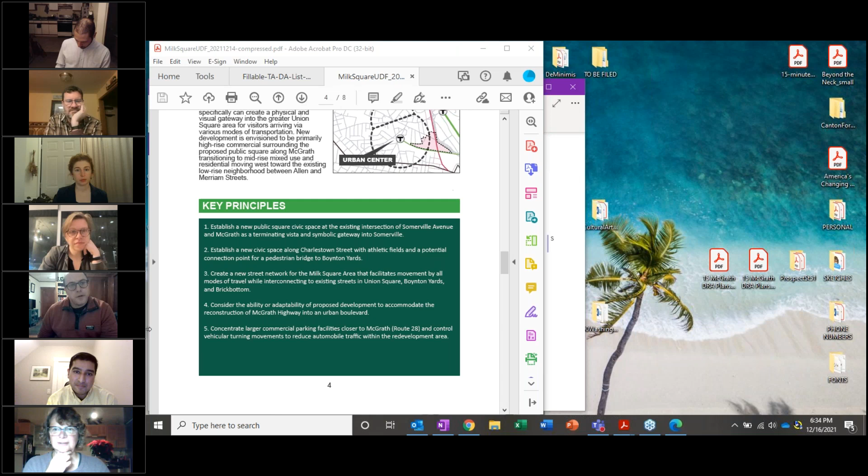So, thanks Jahan. Sarah, if we could ask for your presentation on Milk Square. Yes, I will keep this brief, and hopefully I can share my screen and you're getting the right view of things. Do you see the PDF?

Okay, thank you. The Milk Square area is a combination of two areas within, between Brickbottom and Union Square proper. It was part of the plan, let me scroll down, it's in the ordinance as Union Square East. That is generally the site you see here in a darker pink, also known by the address 200 McGrath Highway. The other area is actually part of the Union Square neighborhood plan that was sometimes referred to as Union East in that plan, sometimes referred to as Milk Square.

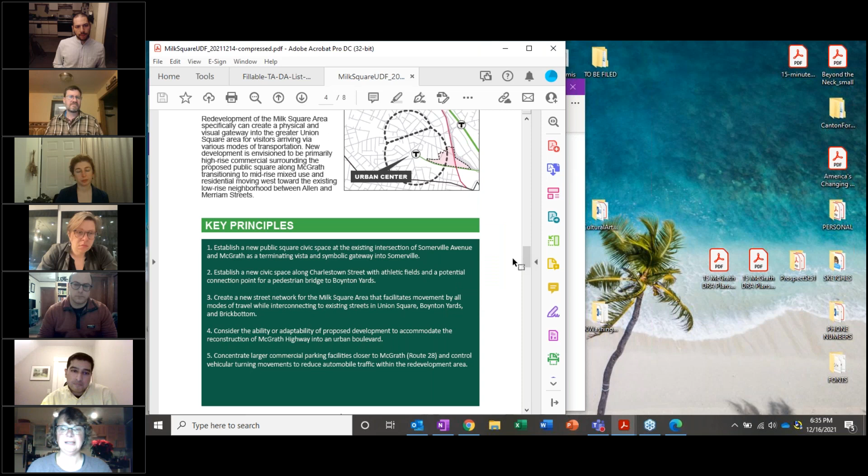Milk Street was the former name of Somerville Avenue, and the Union Square neighborhood plan identified a street network that brought into effect the idea of a new open space. Sorry if I'm making you seasick. Once McGrath is grounded, it will be the edge of the urban boulevard and is basically across from the art farm site. So this is what we're calling the Milk Square area at the moment.

It does take into effect what the Union Square neighborhood plan outlined as the Grayfield development sites. For those more familiar with what's on the ground, that would be the area where the Burger King is on Somerville Avenue, where the Target site is, and further down Charlestown Street. We've also included in this area what was proposed in the neighborhood plan as the Charlestown Street athletic fields.

So these were areas that were treated loosely in the neighborhood plan. They will need more study as we move forward, and so there will be another planning exercise that looks at these areas in detail. That includes the areas closer to Union Square as well, sort of between Merriam and Allen Streets. That will be a future neighborhood plan, but this urban design framework sets up the need for that.

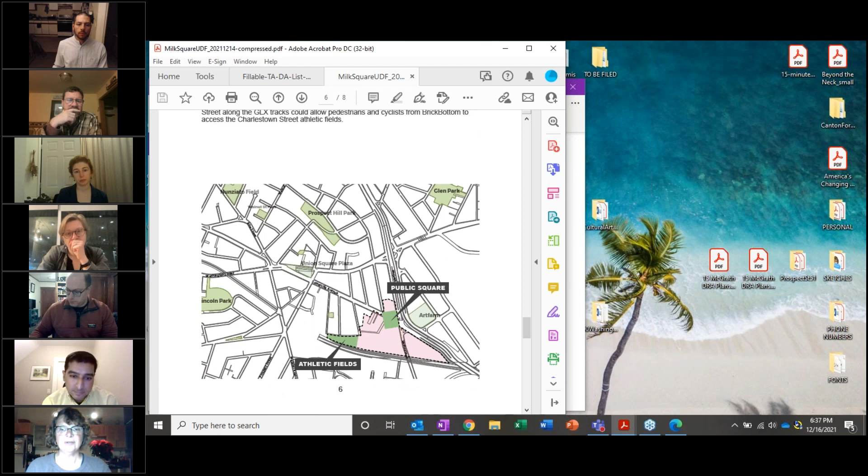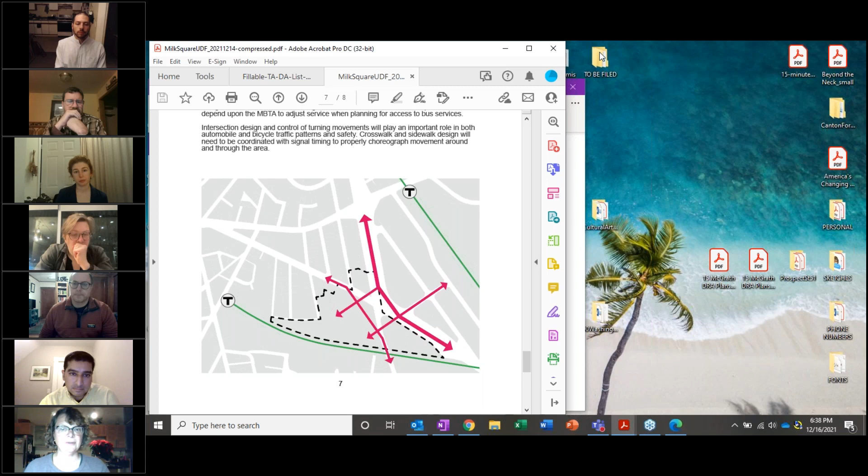Coming back to the Union Square neighborhood plan, there was a network proposed to link the Brickbottom neighborhood across McGrath Highway with the grounding of McGrath to the open space I mentioned, and also a potential realignment of Medford Street into Somerville Avenue to clarify the area that is currently the pinch point where Somerville Avenue comes into McGrath Highway.

The big information I do want to impart is, as I said, a lot of this will be refined further with a neighborhood planning exercise, but we did want to bring it to the attention of the planning board and get this process started. It can be refined as we go along, but know that this is an area that is going to be moving forward.

We expect it's similar to the Boynton Yards area to have a 0.6 per 1,000 square foot parking ratio on the entire district, which means on the 200 McGrath site, that would be about 700 permanent spaces. We can dig into that once we have a more detailed neighborhood plan for this area.

The intent is that it will transition from the higher traffic McGrath Highway, where there might be taller buildings, to being sensitive to the residential area between Union Square and Brickbottom.

All right, looks like we got the presentation, so I'll start with an introduction here. Once again, my name is Ryan Souls, the development director on this project, working with Greystar, the developer and owner of the site. We're excited to be back in front of the planning board this evening to continue our discussions on our proposed development project at 74 Middlesex.

Just as a quick refresher, the project is a 16-story, 494,000 square foot purpose-built lab office building in the Assembly Square neighborhood. The project plan also includes a neighborhood park civic space located at 0 Kensington Avenue that I think will be discussed, similar to last meeting, subsequent to the 74 Middlesex building.

John, you can go to the next slide if you want. I think we heard a lot of good feedback during our hearing last month, and there were a handful of items that the planning board asked for additional detail on and had questions about. So we have a very short presentation hitting on some of those materials, and then I think we can open it up to more general questions and comments. You can see here an outline: the facade materiality, ground floor and 16th floor program, the parking program, the canopy and building base, the utility plan, and then, similar to before, we'll pause and start the 0 Kensington civic space separately. Next slide, please, John.

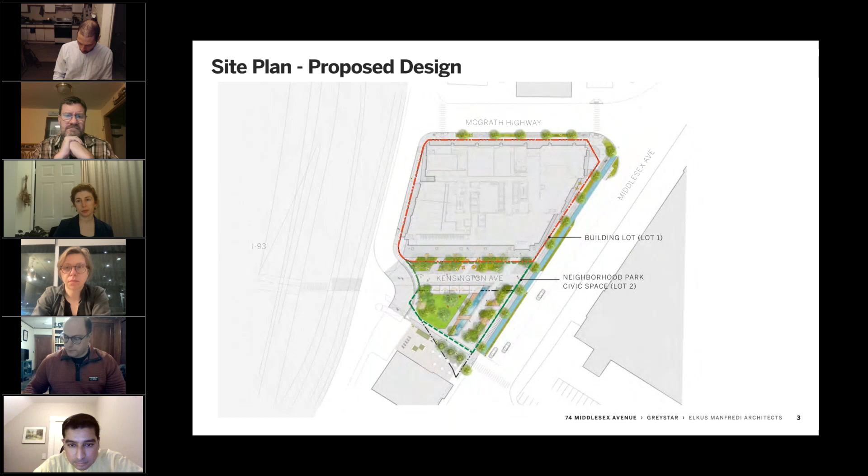I think we might handle some of them together, but just outlining the building lots: building lot 1 shown on this plan is the 74 Middlesex building, and lot 2, the neighborhood park civic space, is the second part of the application, just to orient everybody. Next slide, please, and I'll pass it over to David.

It is made up, and most of you will remember from our last presentation, of these 3 parts that kind of slip past each other, giving the building its shape and quite different articulation on all 4 sides of the building, which I think gives it great interest. Next, please.

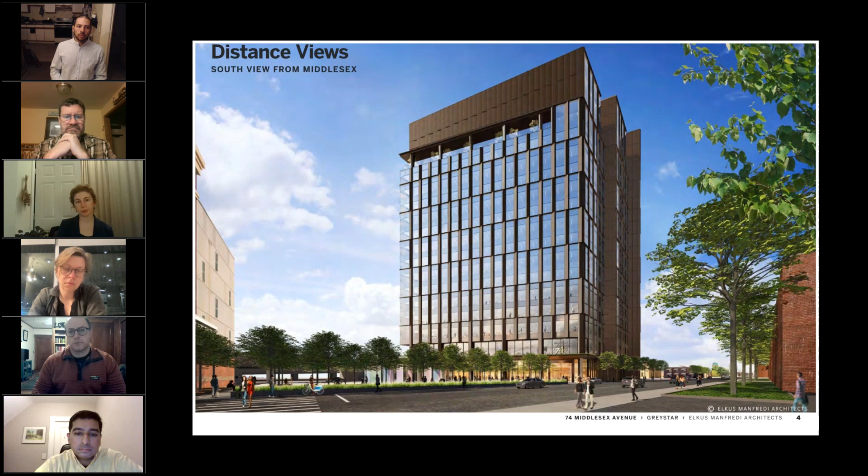So coming up Middlesex from the south, again, you can see the self-storage building, the neighborhood park, and then the proposed building with a very simple but highly articulated frame. Those are metal panels. The floors are ganged together 2 at a time. There's open space up at the top of the building for the tenants of the building. You can see how the building on the west side, on the highway side, actually is shaped to that site, and as you'll see in a moment, gives the building its real character. You can also see that the top of the building, the mechanical spaces are kind of pivoted in order to provide full expression of those areas as well, and not as an afterthought. Next, please.

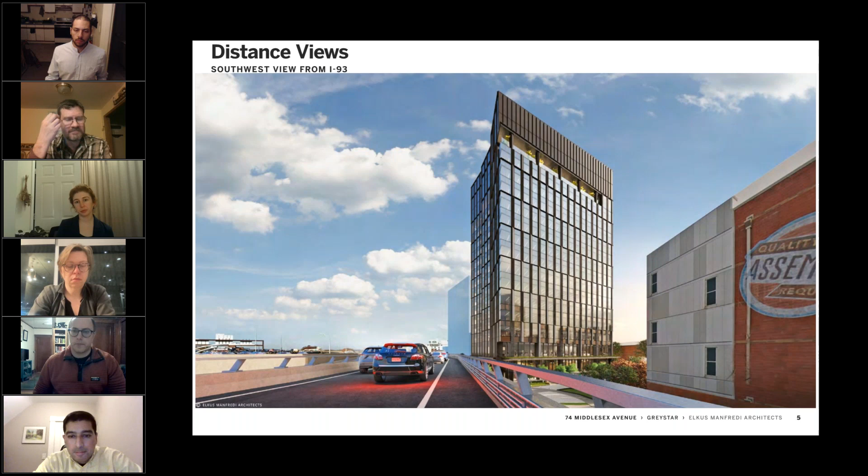And so on the west side of the building, that's 93 in the foreground, and now you can really see what I'm alluding to in terms of this kind of 3-part composition, this notion of these very slender forms and how the cladding of the mechanical at the top of the building is made fully part of the architecture of the building and not an additional piece of massing that's kind of plopped down on the top of the building.

Next, please. And so we spent a lot of time with Chapter 5, the high-rise district design criteria, and I think we are completely consistent with regard to this very strong idea of a unified whole rather than a collection of unrelated parts. And so we have kept the material palette to a minimum, really three materials plus the glazing. Your standards, which require this kind of horizontal stacking and not an ungoverned mix of materials in order to really highlight the big idea of a base to the building, a middle, and a top, all of which we think is well-reasoned and good urban design.

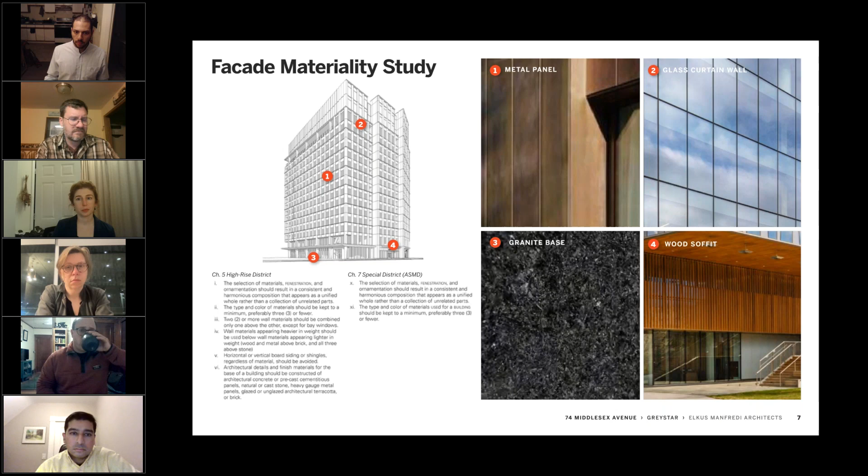Next, please. You can see my colleague, John McDonald, on site. We wanted to see our metal samples on site. You can see the glass he's holding in his right hand, very transparent, the metal panels. This isn't absolutely final, but we've gone through a whole series of tests looking at that metal panel, and you can also see the wood. That's the underside of the canopy.

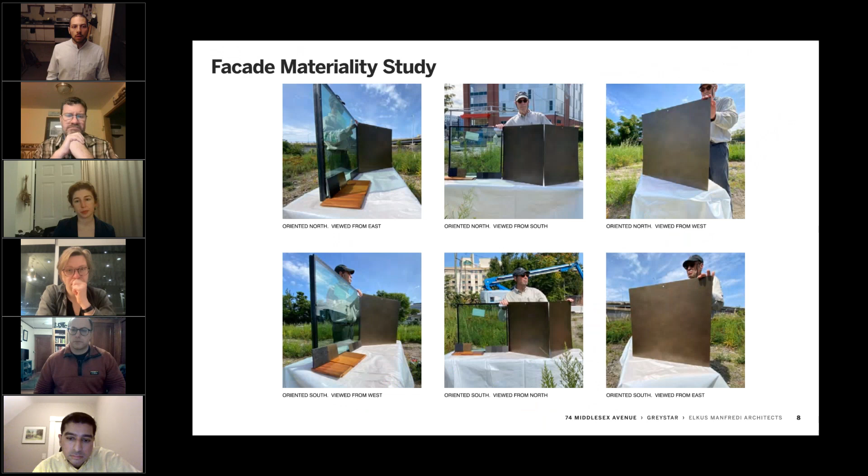Next, there are simply some additional photographs, combined into one. That's okay, that's fine. I want to go to the ground floor. There was a specific question.

You can go to the next, John, which had to do with how the ground floor works. You'll remember I mentioned we have this through lobby. What you see in the lavender color is the through lobby, anticipating future development north of McGrath. Active edges on the neighborhood park side, on Middlesex, and wrapping the corner onto McGrath. All of our building utilities, loading docks, and access to parking are on marginal, up against 93, and pretty much invisible to pedestrians.

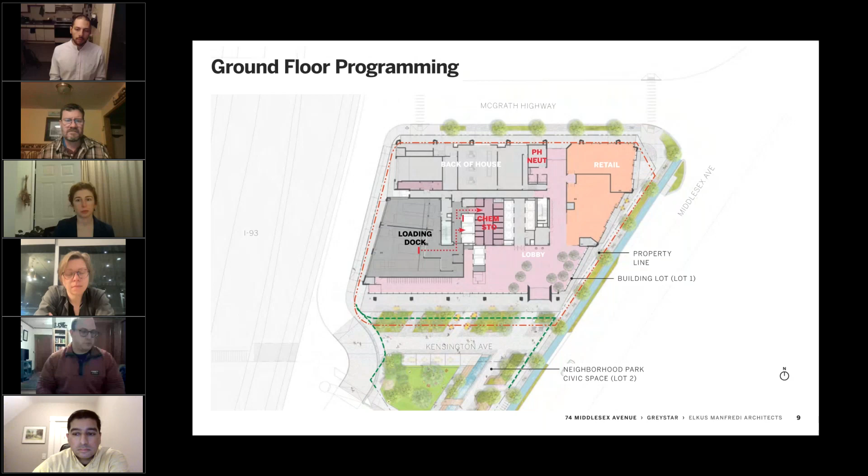There was a question about chemical storage. This is a lab office building, so all of our loading docks are completely internal. All offloading happens on the dock. If you follow the red dashed line, you can see sometimes material goes directly into the service elevators and up the building. Sometimes it goes into chemical storage, awaiting retrieval and transport up the building. The reverse flow happens for used chemicals, with pH neutralization treating the used chemicals. Next, please.

There was a question—I should have mentioned, we won't go back, but our bicycle storage is much more than bicycle storage. It is a celebration of bikes. It's on the ground floor, facing out onto the neighborhood park. It's basically a two-story space, and the intent is to make this a real hub for bicycling in Somerville. We've located our lockers and showers up on the top floor of the building, which is our rooftop amenity.

And there's a question, why'd you do that? We did that for two reasons, really. If you look closely, this is our amenity space. There's a Pilates/yoga kind of room where you see the 12 or 13 rectangles off to the left, and a golf simulator space. The intent is that there's an exercise room on top of the building. There's a lot of competition for space on the ground floor, especially given the dedication of space to bicycles, so the lockers are here on the top floor. We'd expect individual tenants will provide those kinds of accommodations as well—we see that in most of our buildings.

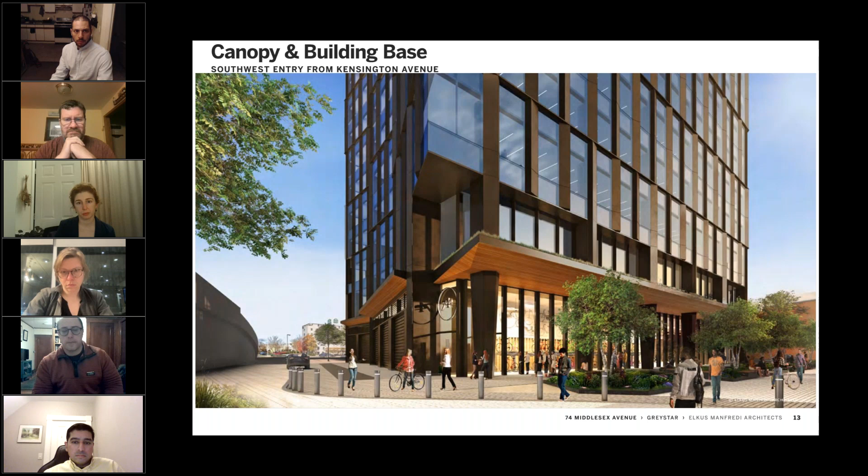Next, please. This is my last slide, and the last of this part, lot one of the presentation. There was a question about overhead power lines, which exist today. The existing overhead lines are the red dashed line, and the power lines will be buried for the length of the solid red line. They will be brought down underground and then brought back up again beyond the site. You can also see new underground tel data lines that will be located adjacent to the power lines.

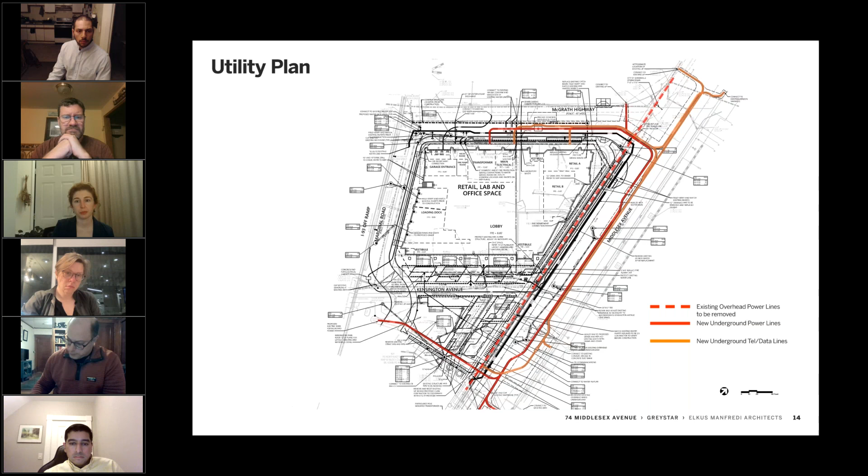And with that, that concludes our presentation, first part on lot one on the building, and happy to entertain any questions. Great, thanks very much.

This is an application that was previously opened, previously presented, previously taken testimony on, and previously had discussions and questions by members of the board. The questions and concerns of board members are why we have the application before us again. It is not new information; it is responses to comments and questions that members of the planning board had at the last meeting.

Oral testimony closed at the end of the meeting on the 18th, and written testimony closed on Friday the 10th. So because no new information has been presented, it was just in response to questions by members of this board, testimony will not be reopened this evening. For anyone in the attendee list looking to speak tonight, testimony has closed, closed on the 10th.

So what I'd like to do is open it up to members of the board to ask any further questions of the applicant or of staff, or make any comments. Obviously there was quite a bit of discussion at the last meeting on this, so I don't know if what the applicant has presented has answered some of the questions.

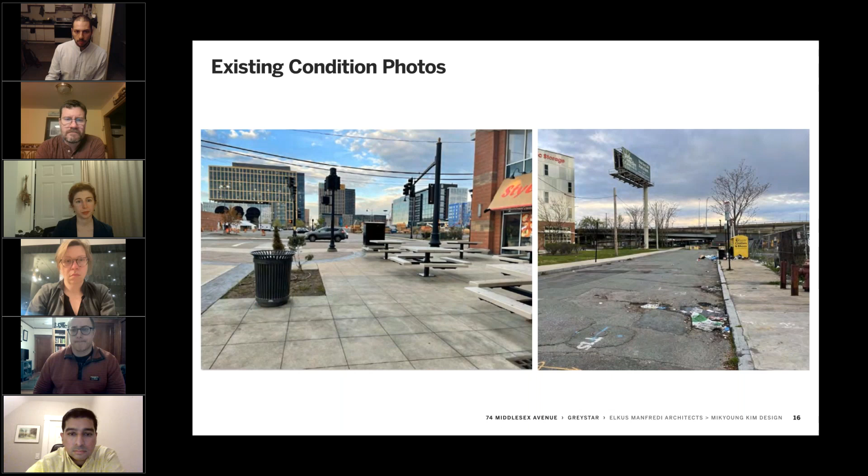We've been working closely over the past almost year now with the UDC and PSUF. Working with them, it became clear that the programming was really important, and ultimately our goal in this pocket park or neighborhood park was to create a diversity of experiences, bringing passive and active recreation within this community park. So we have fountains, shade trees, a central lawn and garden seating, and a trellis with flexible seating underneath it. Together all of these different elements are focused on creating a welcoming environment for the neighborhood.

There were some questions about connectivity, and I think through our discussion we wanted to share the diagram of both pedestrian circulation and bike circulation. Connectivity was a really important driver for the overall design. You can see there are two main access ways through the park that connect you back to the city of Somerville, but also we've been working very closely to make sure that the connection to the Kensington Underpass, or Kensington Connector, is coordinated really well with this park.

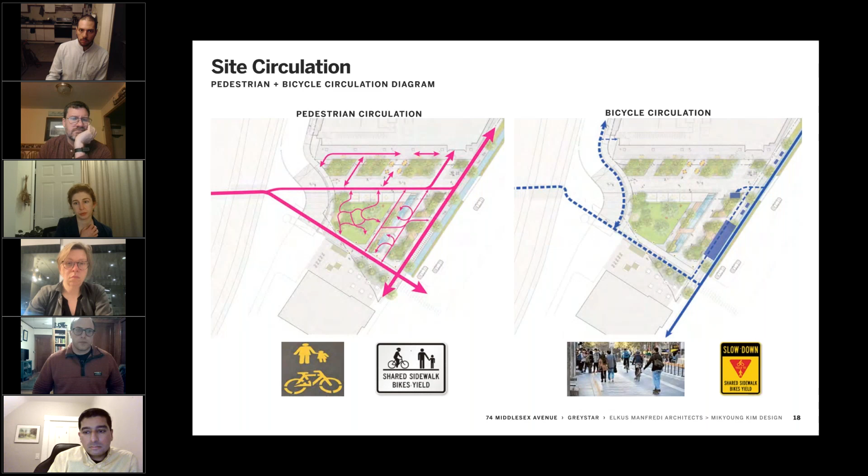We've kept it really short. We felt like the park itself will provide not only a lot of great programming for this neighborhood, but also an asset of native, high-value plants and diverse habitats, so that all season the neighborhood has a place to go to. So we're very excited to hear your comments about this.

Thank you very much. Similar to the other aspect of this site, where it had previously been open, testimony had been taken orally and had also been left open for written comment through the 10th. Testimony has closed. This was a response to comments and questions from members of the planning board. No new information has been presented, so testimony will not reopen on this application. We are here simply for a discussion from members of the planning board with the applicant and with staff as needed, so that we can move forward with this application.

So does anybody have any comments or questions right now on what was presented just now?

Yeah, Rob. Yeah, I have just one question. To what extent have or will the applicant be coordinating with the city and MassDOT's plans for their renovation of the Kensington connector? Part of the reason why I'm asking is I think everybody recognizes the importance of that linkage, and I'm trying to understand, will it feel like a continuous, seamless pedestrian and bike experience?

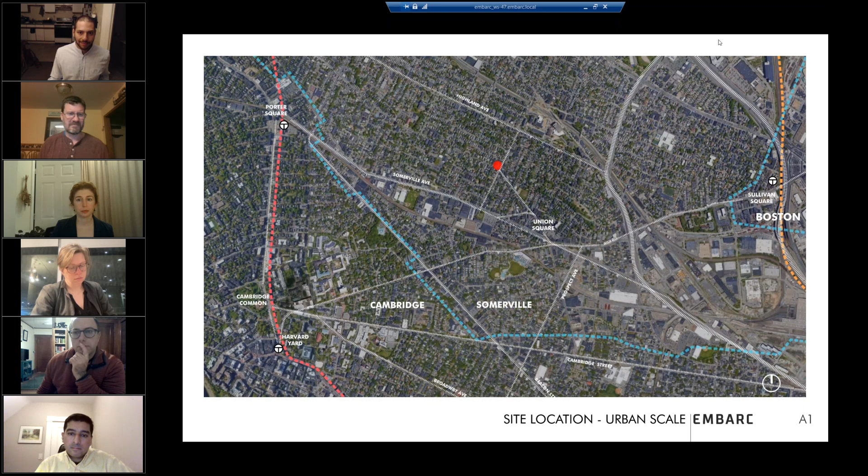You have been unmuted, I'll get started. As Nick mentioned, part of what we wanted to present today was a quick step back to show how we got to where we are today, and where we were initially. Some of our previous analyses were not included in our previous presentations, so we wanted to quickly go through some of that. Just by way of orientation, quickly refreshing on the location of the site here at the corner of Summer and School Street, just to the northwest of Union Square.

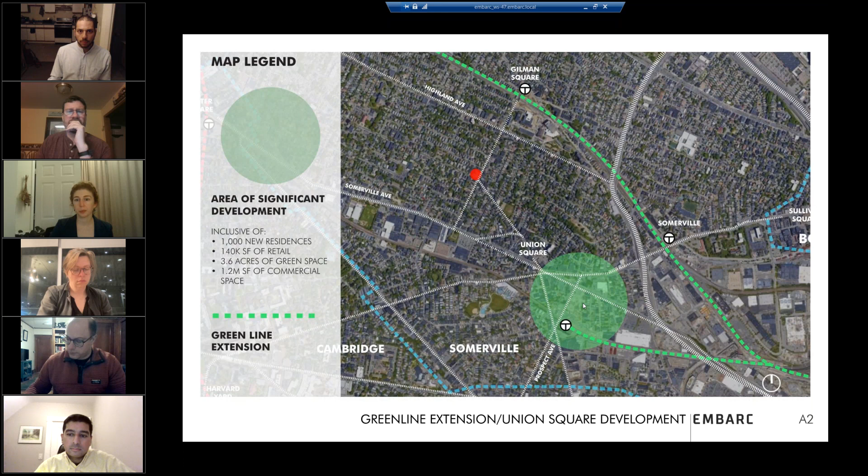Early on, we were cognizant of the future and ongoing development happening in the immediate vicinity, the extension of the Green Line, the addition of several stations both north and south of our site, as well as all the associated development in the area, which honestly extends far beyond what's shown by this green dot. The ongoing development adds to this feeling that we're a link between these hubs of activity that are already there and being increased as the future unfolds.

We're located along this direct link between Union Square and Gilman Square, where you've got Town Hall, the Somerville High School, and various restaurants.

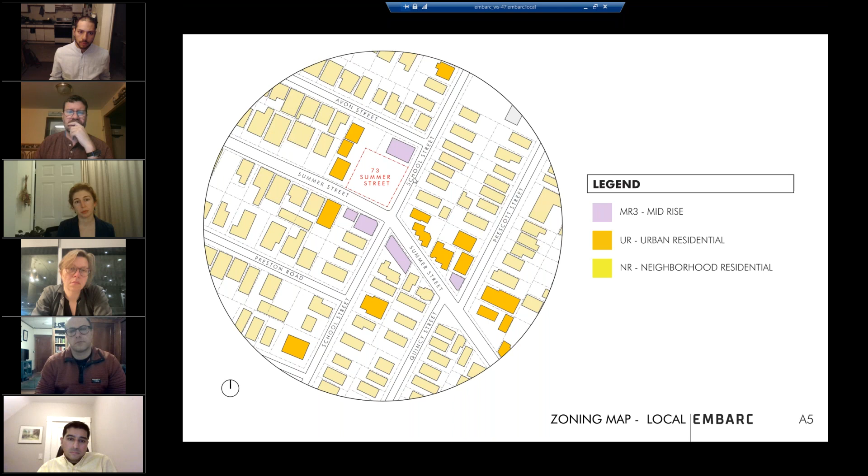Going through our zoning again, we're an MR3 mid-rise, proposing an apartment building, 3 stories with 27 dwelling units on a roughly 14,600 square foot site. We do have 2 front yards.

I'll show you that in a diagram here in a second. 2,500 square feet of open space yields a 0.27 green score, which Ryan Noon will briefly talk about. And then our parking, by virtue of the fact that we're in a transit overlay district where we have a parking max, we have 18 spaces relative to a 27 space parking maximum.

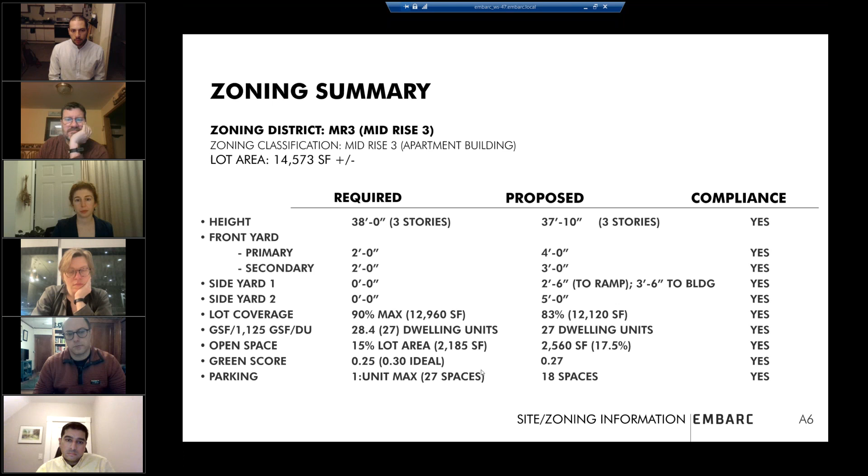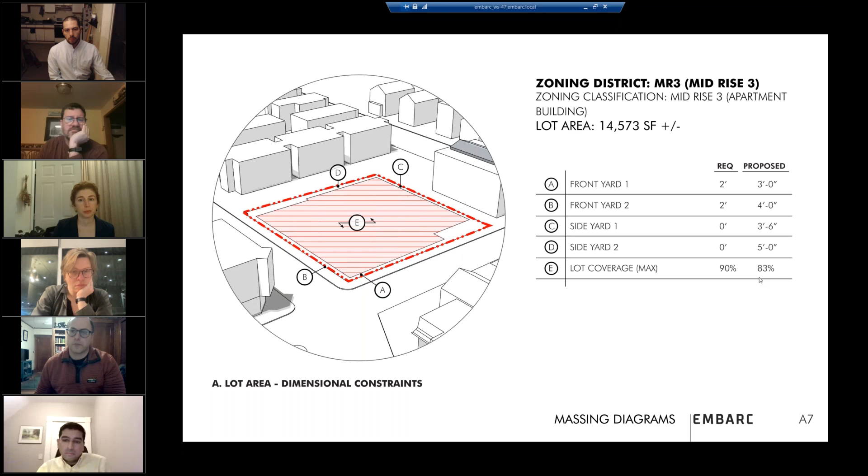A series of zoning diagrams showing how our massing is respondent to the zoning. We have 2 front yards, required 2 feet along both front yard property line setbacks. We're at 3 and 4 feet respectively there to create roughly a 12-foot wide sidewalk along both streets. We have 2 side yards that require 0-foot setback; we're at 3.5 and 5 feet respectively. That yields an 83% lot coverage relative to a 90% requirement.

We extruded that footprint up 5 feet 10 inches to get to our first residential level. That comes straight from the zoning, creating a base that allows our windowsills to be at an elevation that creates privacy for the inhabitants and hopefully encourages them to use those windows for things like ventilation and natural daylighting. Then we extruded that footprint up to the allowable, or just under 38 feet.

At the pedestrian level, we wanted to create entry to the building removed from the intersection. So our pedestrian entry along Summer Street is kind of halfway along the facade, and we pushed our vehicular entry as far away from the intersection as we could. Then at the street corner, we took this notch out at the base to try to create better visibility around the corner for traffic purposes.

And then to the north, finally, we pushed back the massing there to create this public parklet along School Street. Then the rest of our open space, shifting over to this right diagram, we consolidated with that public component to create this amenity courtyard for the inhabitants of the building.

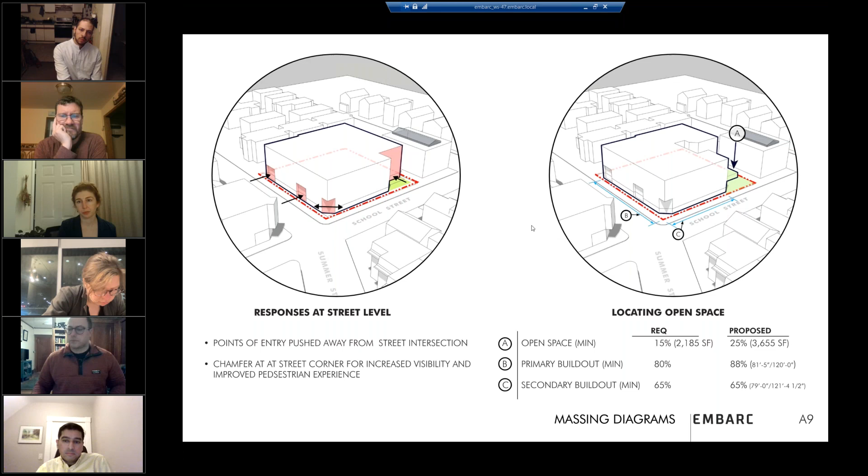I'll take you through the next handful of slides, which are the floor plans of the building. I know we presented these last time, so I'll do a fairly cursory review and just highlight the changes we've brought for this presentation.

By way of orientation, Summer Street is on the bottom of the page, and School Street runs vertically on the right-hand side. As previously spoken about, on the left-hand side of Summer Street, as far from the intersection as possible, that's where the vehicular entry is. We have an update later in the slideshow where we also locate our loading zone for the building, which was a comment from our last hearing.

About halfway down the building on Summer Street is our pedestrian lobby. Moving around the top of the page, the building steps back and we've created a community benefit, open space for the community. We're calling it the bike parklet, beautifully landscaped with a mature tree, two bike racks, a bike fix-it station, and seating areas. Just beyond that, raised up on the podium level, is the amenity space for the building's inhabitants. At the top of the page is our accessible ramp leading from the sidewalk directly into the building.

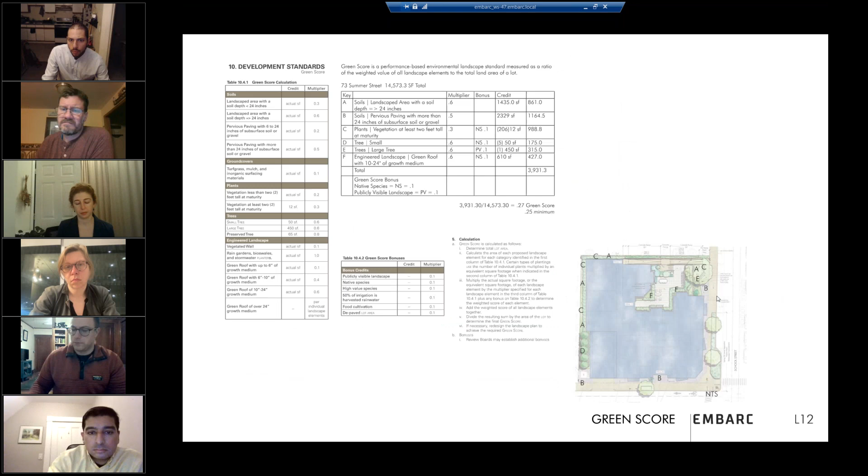Also on this level, we have a fairly robust indoor bike storage area. We have some mechanical space for the building, the trash room, and we also have what we're calling the work from home hub, in the bottom right-hand corner of the plan. Our expectation is that we fit this out such that residents of the building can utilize this flex space, work from home if they have to. It would just generally be an area where the inhabitants of the building can congregate. And we're taking advantage, Ryan Sprague can speak to this later, of the corner of the building where we actually have some expression of windows on the base level to let light into that area.

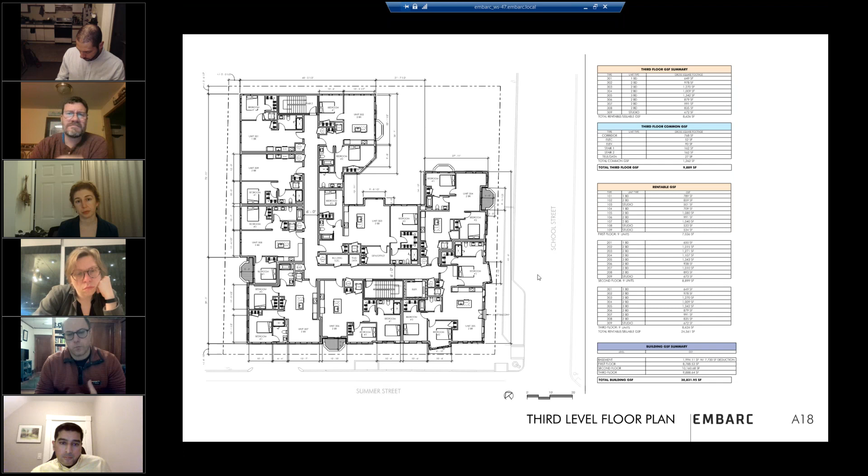We are proposing an all-electric building, so we obviously do have some electric heat pumps up on the roof to provide heating and cooling for the units and ventilation as well. You'll see our elevator overrun pops up just about 3 or 4 feet above the roof line.

And the area shaded in yellow is about 2,500 square feet, and that is a location which we are going to pre-wire for future integration of PV solar panels. The roof trusses are to be designed to obviously take the load of future solar panels, so we're excited about that.

I believe that concludes the floor plans. Turn it back over to Ryan Sprague. Great, thanks. Yeah, so just wanted to now take you through some of the design changes from an architectural standpoint.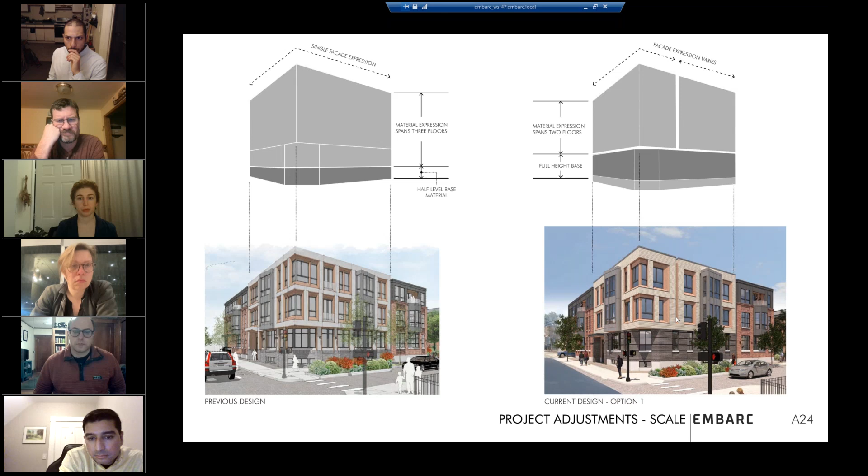And then from there, try to reinforce that with our window configuration. As I mentioned, previously we had created this field of window openings that took up a good percentage of the facade, and I think in some ways that starts to promote this feeling of brutalism, and the material doesn't really help that. So we tried to be more intentional about how we were using our window openings, tapering down the amount of opening along the facade.

Within these volumes that we created, we tried to create specific window strategies or types. To the right of the slot, you have a more regimented and regular punched window opening. To the left, it's a bit more playful. And then in the base itself, changing window types altogether, trying to pull more contextual material type into that, and felt like that was helping to break down the scale a little bit and shed this brutalist kind of expression.

Zooming in a little bit to further that point. So not only were we sort of three stories of the same material, we weren't distinguishing enough the base. Even the base before was this vaguely darker gray brick that transitioned into something that looked a bit like concrete. Conversely, we've tried to break that up by pulling the brick up, which has allowed us to start to create texture at the base that's more contextual, introducing this belt coursing, which you see even directly across the street, and then as you go up to the upper floors, trying to create these single story expressions by varying the material treatment at each level.

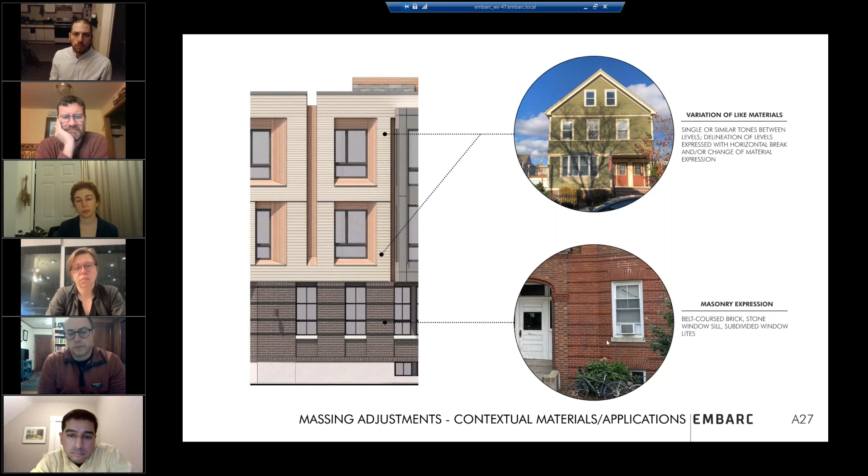As I mentioned, directly across the street, this lower picture is our abutter directly across Summer Street. Belt coursing, brick detailing in general is kind of rampant all over the area, using a stone sill as well, and then lastly, our abutter to the north, really deriving our window selection straight from that precedent.

And then just quickly, speaking to what I had mentioned before with this idea of raising that first living level and how that times out with a standard size human being, getting those sills up out of eye line and allowing for some privacy, and then just generally showing the scale of the sidewalk and the placement of the tree and whatnot.

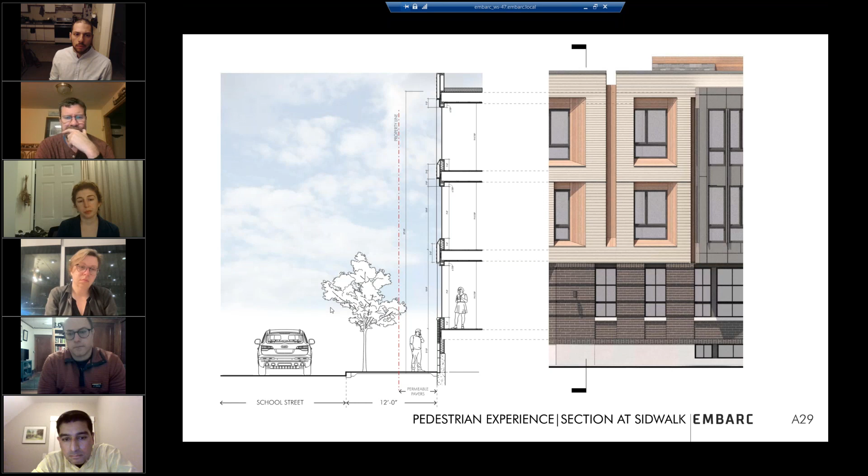I think one of the things we also wanted to do was make sure that we were accurately representing our material strategies and the character of the building we were trying to create. I think we weren't doing ourselves any service with the type of rendering we were showing before, and I think it was important to us to show how we were thinking of the design.

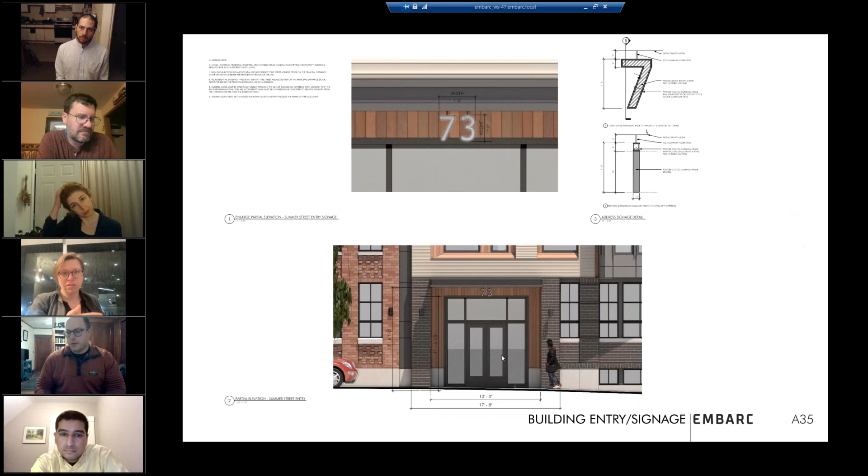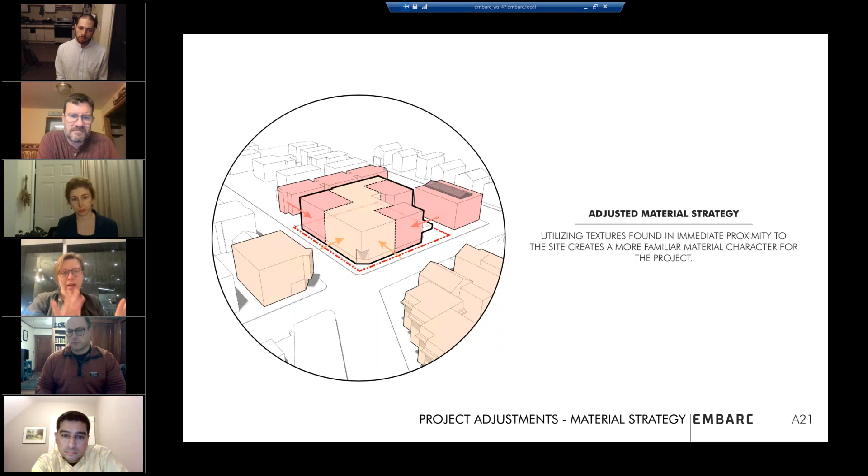Okay, Aaron, yes. Thank you, Mr. Chair. Just a quick question on the front door. I feel like I'm still a little bit confused with the app-based entry system. So that front door to the sidewalk, which is where a delivery person might need to enter in order to get to that locked off delivery room within the lobby, directly on Summer Street, how is that double door secured or accessed?

Good question. Again, this is Ryan Noon from Embarc. So further reiterating, that door is always locked. It will be an electromagnet lock because residents of this building will have a key fob. They'll be able to swipe their key fob and or type a passcode into this device, which will be placed next to the door itself. So we'll have electric control of a lock mechanism that will open the door.

So this is called the Butterfly MX video entry system. We've used it in a few properties now and had some really good feedback from residents. I think it works quite well with the delivery interface, specifically for packages and the mailman, as well as visitors of the building. You can give a visitor key, or if you have a dog walker, give a temporary key so that on Mondays, Tuesdays, Wednesdays they'll have a certain keypad that works just for those days and dedicated times. It's really centered around usability and functionality, and about public safety and keeping the residents safe.

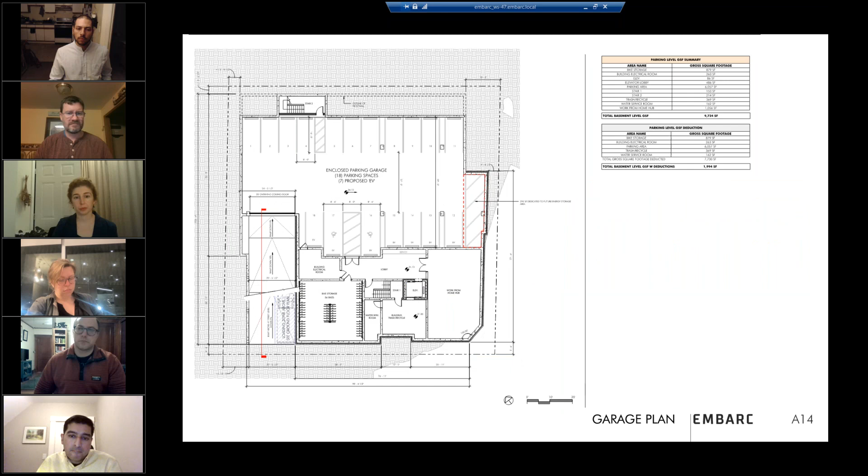One of my big concerns is the plant materials you use. I always encourage using indigenous native plants. That's how we get our butterflies back, because of a specialized relationship with the plants that native butterflies evolved with. I don't know if these developers might want to come to the Urban Forestry Committee, but I would be interested in seeing it. So please use native plants as much as possible.

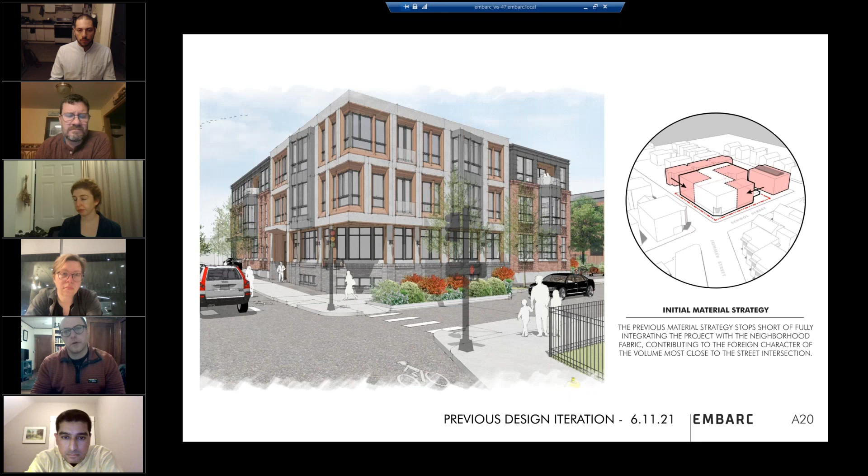Hi everyone, great presentation. I echo the statement that I'm also very excited to see this project take progress on the corner of Summer and School. Just a note on the Elfland legacy - in one of the renderings showing School Street coming to the corner, it looked like there was a little patch by the side, right there, with all the plants. I assume that is going to be public space, but I just wanted to suggest that that could be a potential future site for Elfland if we choose to allow that to live on.

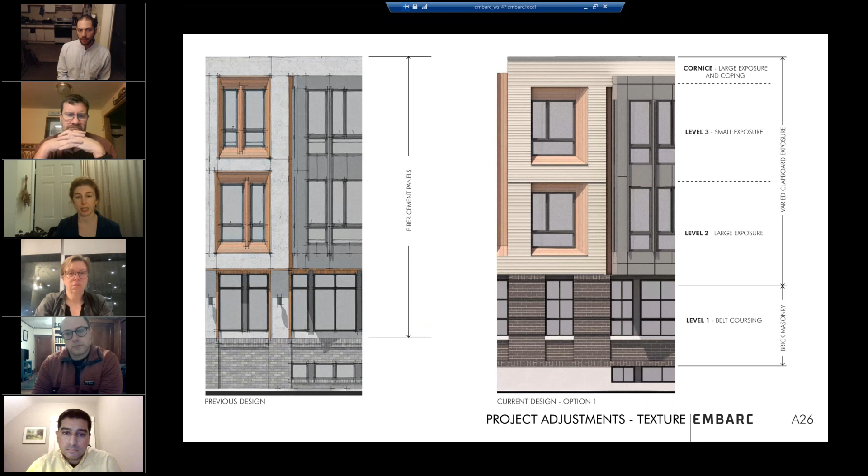I'm a little bit concerned now about the overall number of materials and the juxtaposition of so many differing building features between the clapboard-esque portion and the brick portion. At the corner of School and Summer, I find that there is enough visual distinction between the two buildings that I can kind of work around that. But at the courtyard view that you were showing previously, I'm sorry to make you keep flipping back and forth.

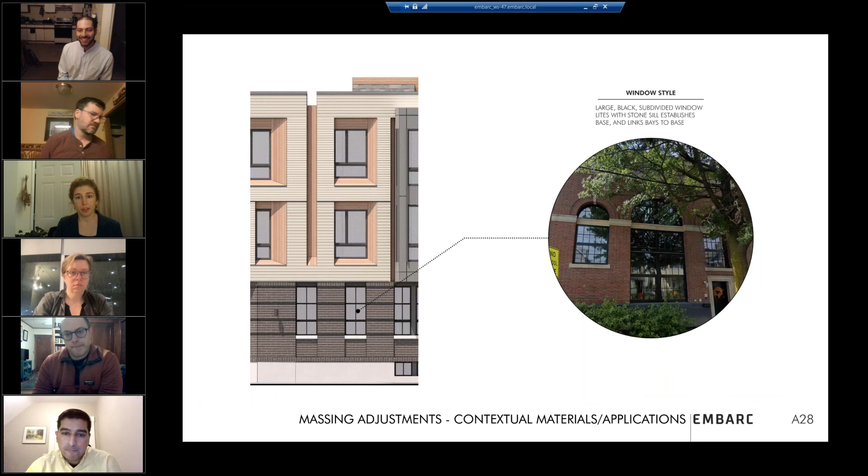At this view, where we switch back and forth between the building that appears to be on the corner of the street to the row house type building to the small amount of the building that's back at the corner, back to brick, this feels to me like the most jarring angle of all of this, because I know the code calls for the appearance of two buildings and you've been very responsive to that, but I don't think that design feature is required at this phase.

I guess it's just my perspective that this view with the change in that interior corner has quite a lot of material juxtaposition in a way that feels a little bit off-putting or overwhelming to me. So I'm happy for the applicant to respond to the design thinking about that interior corner, but just wanted to share that question or concern.

Yeah, thanks for that feedback. I think we can internally discuss that and perhaps do some explorations to try to tamp down on the number of materials we're using in that location specifically.

And to further elaborate on that, this is Ryan Noon from Embarc. I think in previous explorations, and you're right Amelia, we took the letter of the zoning pretty literally with the appearance of two different buildings, trying to differentiate quite literally with different colors and usage of material, palette, and textures altogether. One option, probably 20 iterations ago, had the brick and the dark fiber cement panel meandering all the way through the courtyard, and given the shadow lines, it had a heavier appearance to the building massing itself.

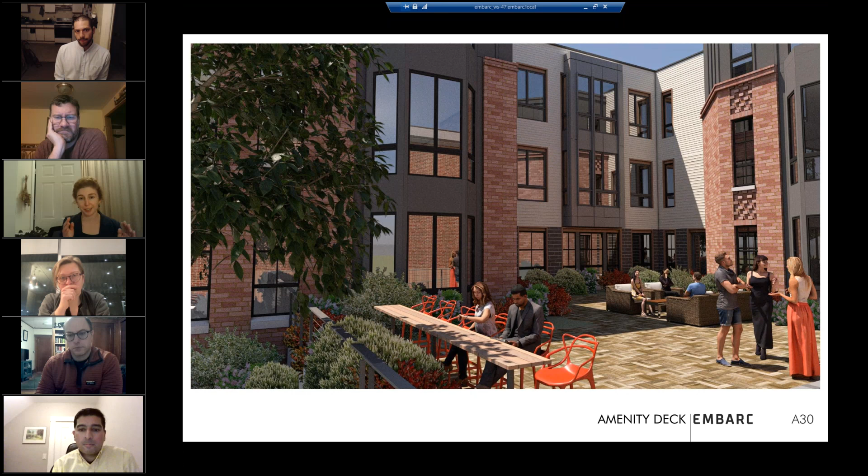I appreciate the explanation. I understand it's a difficult challenge to meet, and there are a few moving pieces here. I think at the point that you're seeing an appearance of 3 buildings with one that differs in the middle, that's the view you're having here, and that's also the view you're having on the corner of School and Summer. Both of those, the juxtaposition does not feel overwhelming. But at the point you have a view where you're seeing all 4 facades alternating, each having 3 to 4 material components, that feels to me like there's an awful lot going on.

I've said my piece. Thank you. Gotcha. Thank you. Thank you.

As we have previously done, when it comes to issues of specific materials used, we have oftentimes put in a condition that the applicant work with staff to make sure the materials are appropriate. So I'm not sure if that's something we'd like to include as a condition for this application, Amelia. I would feel positively about that condition if the applicant were open to it.

Yes, Rob, I'm sorry, are you through with your questions, Amelia? Yes, thank you very much. Okay, Rob?

Yeah, very briefly, I was looking at this and I can see it's an improvement over the last version, so thank you very much for that. In the packet distributed to us in advance of the meeting, I think it included some, I don't know if they were like, other schemes that you had considered.

And the reason why I'm bringing it up is I think I do hear my colleague's comment that there are a lot of materials going on, and I was looking at one of your alternatives that you submitted, and it kind of seems a little more simplified. I don't know, I'm sure everybody's tired at this point, but I think you may have in your back pocket some alternatives that may be somewhat more appealing.

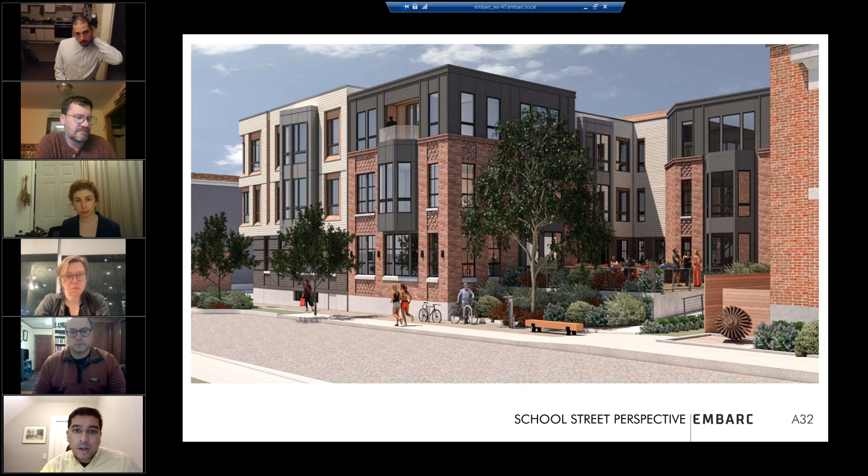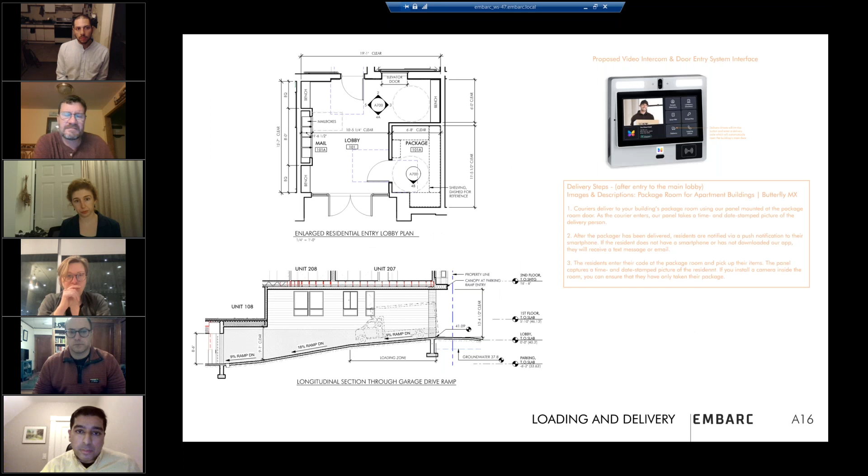I do have a question for the applicant regarding the inner courtyard and open space. I'd like to hear a little bit more about the usage plan, including accessibility and community access, what has been envisioned for this open space, and in particular during these COVID times, is there a time period limitation on the open space, or is it available year round? Basically any background information you can provide.

Great question. Thank you. This is Ryan Noon from Embarc. Let me try to address that in steps. In terms of accessibility, one comment we got really early on with our neighborhood number one feedback was that beyond someone in a wheelchair needing access through the main lobby and elevator, there was a comment about providing a ramp from the sidewalk up to the building as well, which we were more than happy to accommodate. So you see that at the top of the screen here, and that brings direct connectivity from School Street up to the building itself, into the stair core.

From there you'd be able to go down the common corridor and back out to the courtyard, because the courtyard is raised that same 5'10" that the first level of the building is. So the courtyard itself, for the inhabitants of the building, is dually accessible—one from the elevator going up to the corridor, and one using the ADA compliant ramp that leads you into the building and then back out again to the courtyard.

In terms of delineation between public and private, I know that's a comment I've heard maybe twice now. The parklet, which borders the sidewalk, is barrier free, so that is open for all. We want to encourage people from the sidewalk to use the Fix-It station, use the bike rack, enjoy the native species we'll plant there, enjoy that shade tree and the bench. So that's completely public, and we intend for it to be a community benefit.

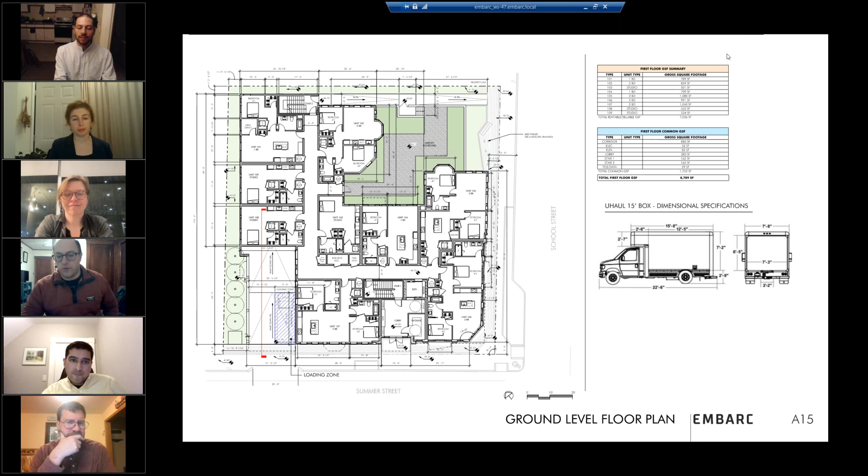And I am looking now, and it's only 8:30, which is a wonderful thing. Thank you, have a good night.

We have one more case on our agenda that is a new case. It actually has been opened already, but we'll hear a presentation, at least preliminarily, on 28 to 44 Broadway, and take some testimony following the presentation and preliminary discussion with the planning board. This is not something that's going to be voted on tonight. This is the beginning of a discussion on this application, and I will be leaving written testimony open at least for a little while after the close of this meeting tonight. So I would welcome the applicant and counsel from 28 to 44 Broadway to be unmuted, identified, and have their screens shared as needed.

This is Raisa speaking. I see Jennifer Schultz's hand up. I'm going to unmute you now. You're unmuted. Thank you, Raisa. This is Jennifer Schultz. Let me see if I can turn my camera on. I'm sorry, I should have been prepared for that. As I'm looking for my camera button, which maybe I don't have, I am project land use and permitting counsel for the proponent and applicant for this presentation.

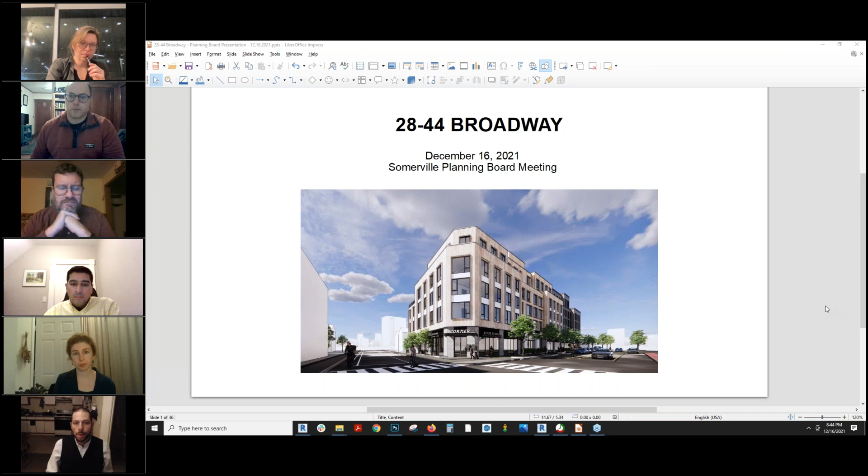Okay, yes, thank you Chairman and members of the board. I'm Jennifer Schultz, Land Use and Permitting Counsel from Sullivan and Worcester for the applicant Highland Development, for the redevelopment of 28 through 44 Broadway. We are proposing a 91 unit mixed use multifamily residential development on the property.

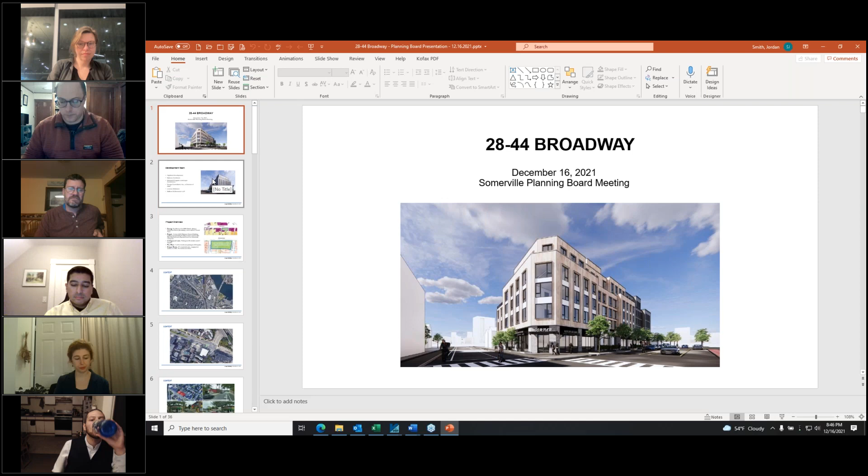So we're here tonight seeking site plan review for the proposed project, and in addition, a special permit for the household living use. The site is located in the MR6 district, and is also located within a transit zone, approximately a quarter mile walk from a T station. As you can see on the screen now, the proposed project is a 6-story general building, just over 80,000 square feet, 91 units, which includes 18 ADUs, which includes all of the proposed 3-bedroom units.

Parking is fairly sparse in the proposal, only 26 cars proposed, where 91 would be the maximum allowed for the 91 units, and parking for 61 bicycles. The staff report indicated a belief that the site is highly suitable for a household living principal use, which we agree with, and that otherwise, per the staff report, the proposal is not anticipated to create any negative impacts that require mitigation. And with that, I'm going to pass it over to Phil to walk you through our presentation. Thank you very much.

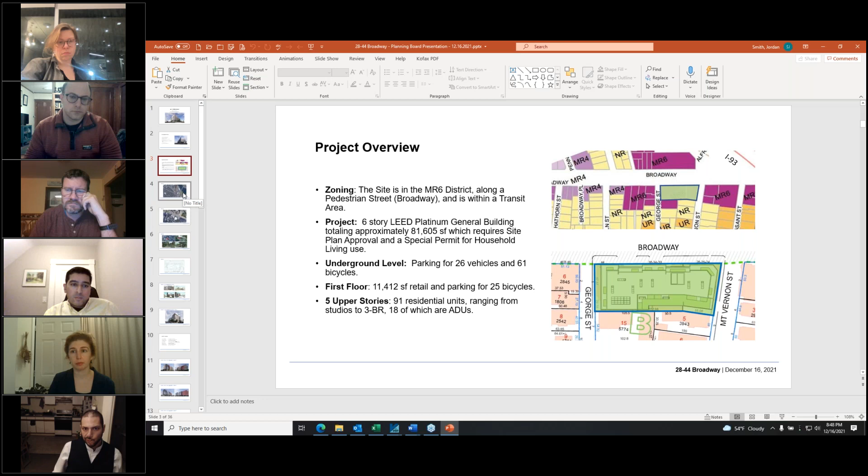The project is located in East Somerville. We've always thought of this as the gateway to East Somerville. As you can see with the proximity, we're very close to Sullivan Square, right next to Assembly Square, but also close to some smaller residential buildings south of the project. So we're trying to juggle a lot, and we're also highly visible from 93—you're able to see it before the visual guides or barriers happen along 93.

Looking closer to the site, you'll see that we are abutted by George Street to the left, Mount Vernon to the right, and Broadway is the main street in front.

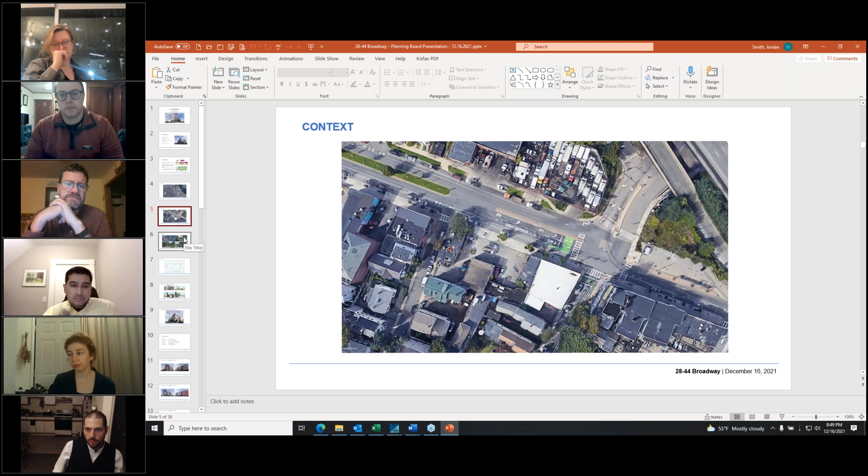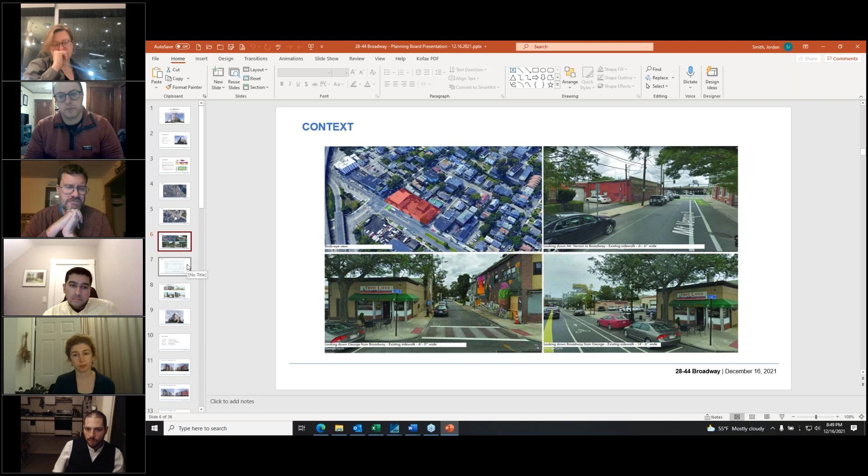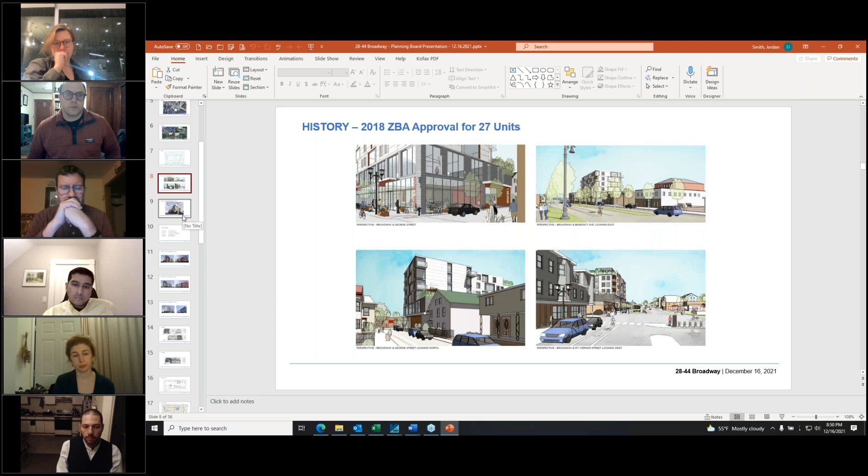This project has a long history. It has gone through multiple ZBA approvals under different zoning regulations. This was when it was a TOD 55, and I think this was prior to Balance Architects working on it, but I believe this was a by-right scheme. The next slide shows the latest ZBA approval under the TOD 55, and now we are doing it under the MR6 zoning.

Going over the process we've gone through in the latest iteration of the project—we've had 2 neighborhood meetings, a UDC meeting, and the UDC approved one of our schemes on the first meeting with them. We have submitted the DRA application, and now we are making our presentation, but we also want to walk you through the history of that project with the UDC and look at the design options. So we presented 3 schemes to them.

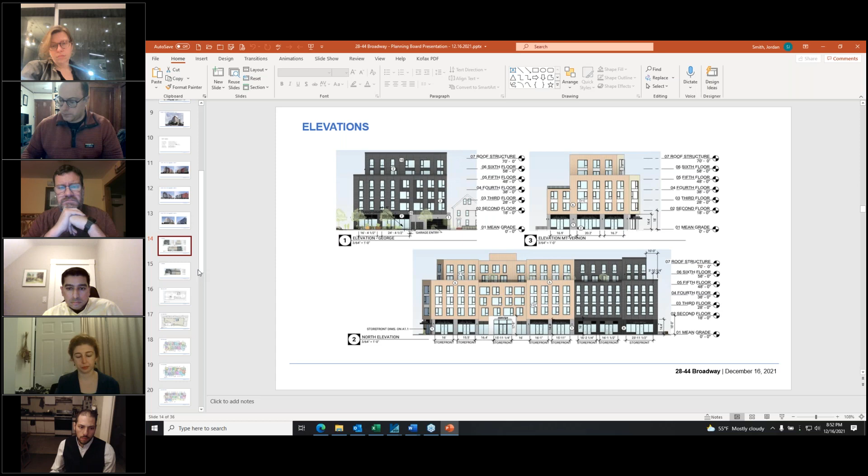In terms of elevation, this is a pedestrian street, so we have ground floor retail. The hope is that this will all be local small business, restaurant would be great. If you look top left on the George Street elevation, our building is about 200 feet long, and the site is 221 feet, so we really have the ability to scoot and move the building to allow for outdoor seating. We've done that on George Street, which is the quieter side of the building, and we have our garage entry furthest away from Broadway on that side as well.

When you look at the north elevation, which is Broadway, you see we have this distinct entry for the residential portion of the building, surrounded in white, while the rest of the storefront areas appear distinct.

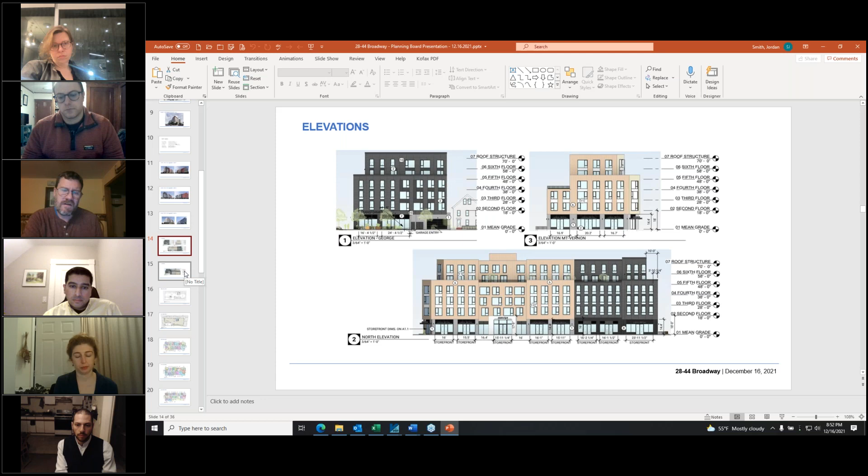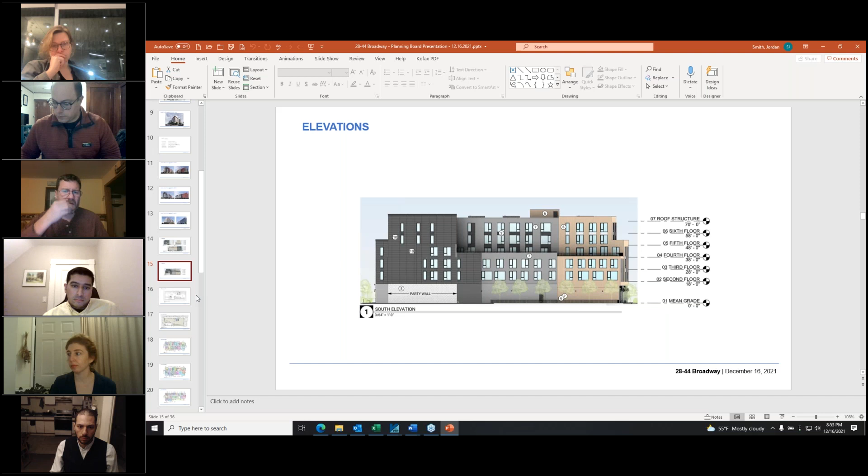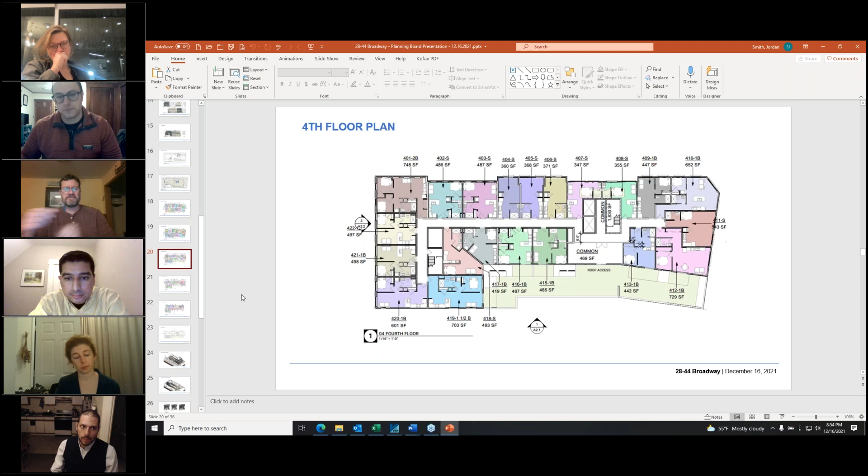As you go up to the 4th floor, this is where we get our step back, because we're abutting that NR on the side yard, so we have more of a step back. Here we have a mix of small roof decks for the units, as well as a really large common one for the building.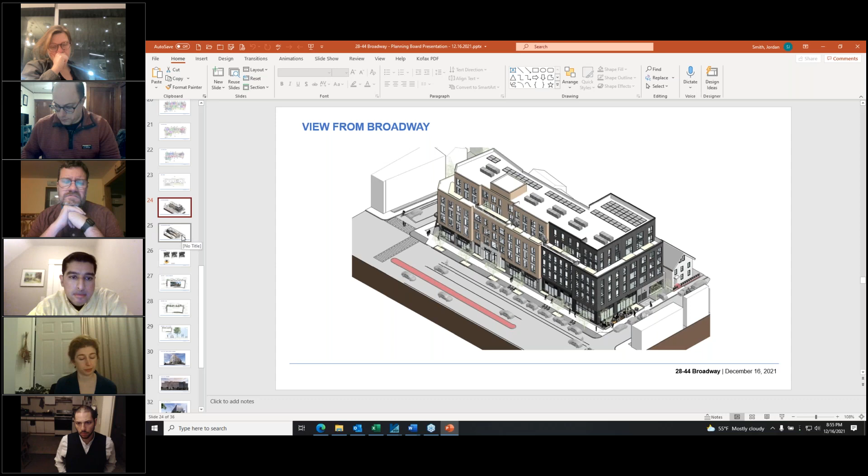Here you really get to see that stepping effect created by those required setbacks, which creates a self-shading condition. If you go to the next slide you get a sense - this was always a conversation that would come up, like, you have a really huge building next to some smaller homes, but thankfully all the shade is really happening along Broadway, and those homes will not be affected, at least from the sun.

Also, we don't have a slide for this, but it should be noted that over the last 4 years or so we've been working with local organizations and Tufts about the air quality on the project, just because of the proximity to 93. It's our intent to use a high performance building envelope and really high levels of ventilation. Because it's so close to the highway there are concerns about particulates, so we've got suggestions and recommendations about the certain type of MERV filter that should be required for the building.

And with that, I'm going to pass it off to MDLA.

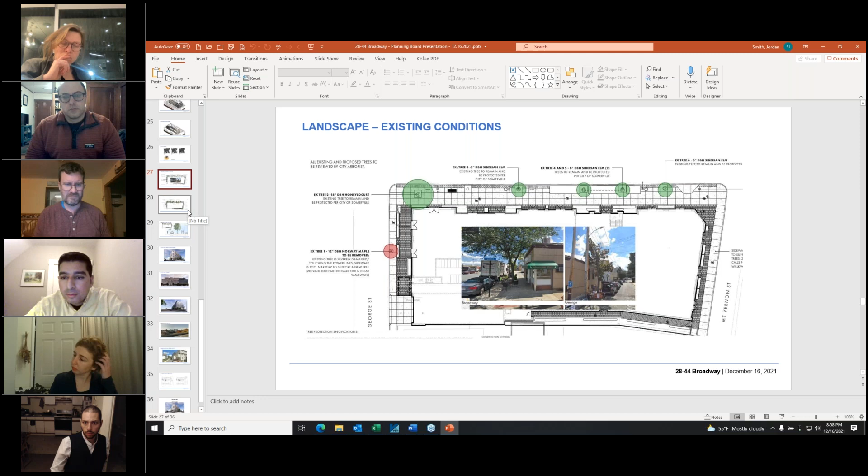You'll notice along Broadway we're able to keep all of the existing trees. We worked with city staff members on that to ensure we can keep all of those that are out there today. There's one tree on George Street that is heavily damaged and affected by the power lines, so that is going to go away, but all the rest of the trees will remain. Next slide please - here's the proposed condition.

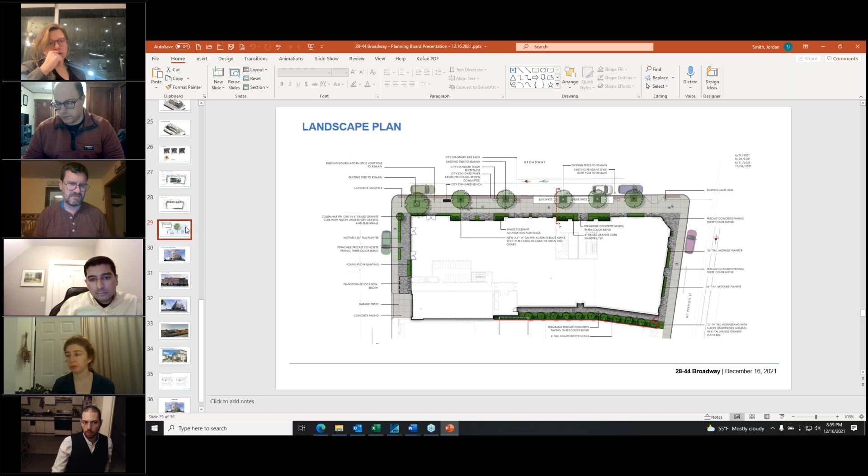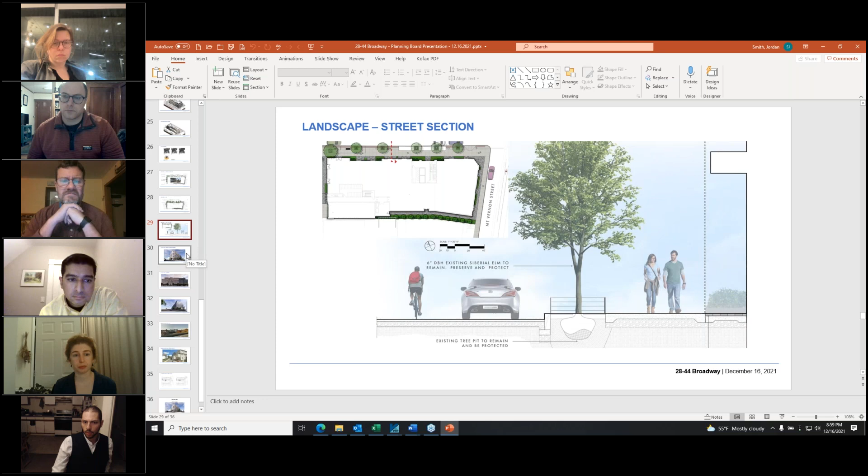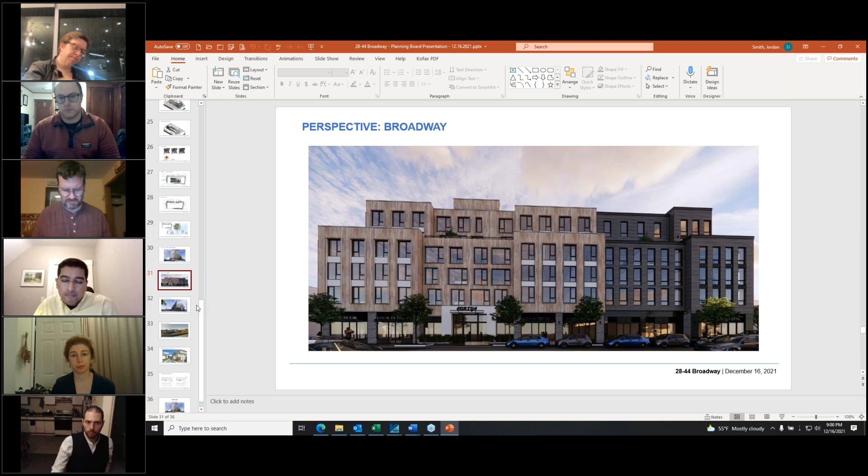If you can go to the next slide. And you can see this play out, especially on the left side of the building. So we're really treating it as 3 parts. In the center, you have your residential entry, and on either side of that is the commercial spaces below. We are showing the vertical bands on those two sides that flank the residential entry, and then when you move to the right, you clearly have a different, distinct building style that doesn't connect the verticality in the same way.

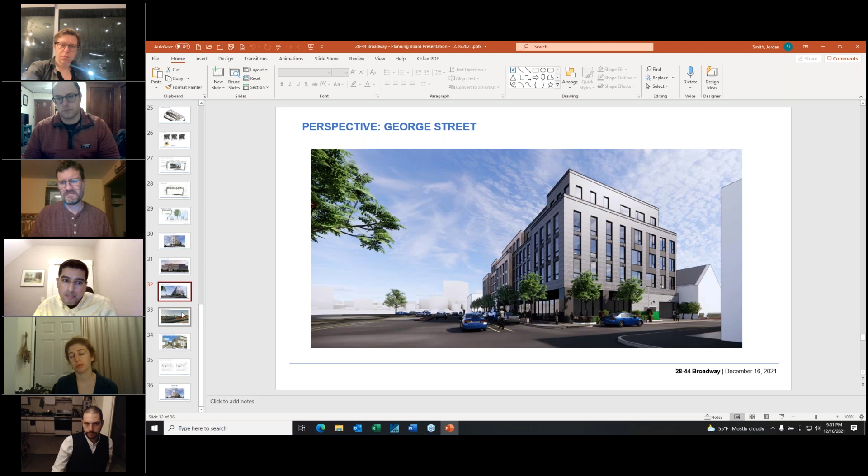This is from perspective, George Street, looking down towards 93. The building starts to be a little bit more traditional, some more masonry on the ground floor, and you can see that outdoor seating along there. This is the view that you would get when you're driving by before those visual barriers pick up. There's kind of a consistency in the height, that 3 to 4 stories that you're seeing on the other side of Mount Vernon that will generally be consistent from a perspective and distance.

And then when you go to the next slide, we're in a neighborhood that has some smaller residential buildings, but I don't think we're certainly going to shadow them. And with the heights and the way that it relates to Broadway, it actually integrates, in our opinion, fairly well. And the next slide is related to civil, and I think we're going to have someone from DCI hop on to discuss that.

I want to keep this short and sweet. The staff memo agreed with everything that we had in it, saying it won't create any adverse impact to the network around the site.

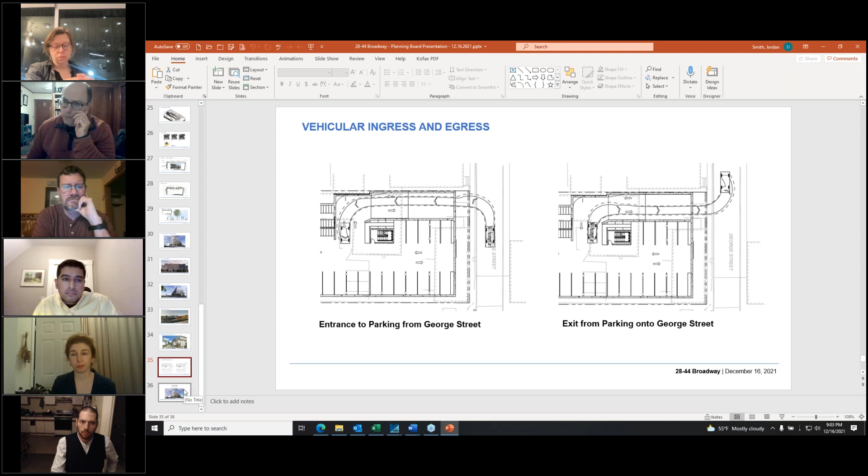Okay, thank you very much for the presentation. I know I will have some comments and questions, but I'm going to reserve mine until after we hear from the public through some testimony. I would invite members of the planning board who have questions or comments to raise them now if you want. If not, we can hold off till the end of testimony or another day, since this is the beginning of the process for this application.

I don't know if anybody on staff has anything they would like to address before I open it up to testimony. No? Okay, so what I would like to do now is...

Open it up to public testimony for anybody that wants to speak in support of this application. I don't have a timer right now, but there are a number of people here, and I think there might be a few people who want to speak. I would ask you to keep your comments reasonably brief, try to keep to 2 minutes, and please know I will be leaving written comment open as well, so if you want to say more, we would welcome that to planning@somervillema.gov. If you'd like to speak in support, please hit the raised hand button and I'll call on you in the order in which I see you.

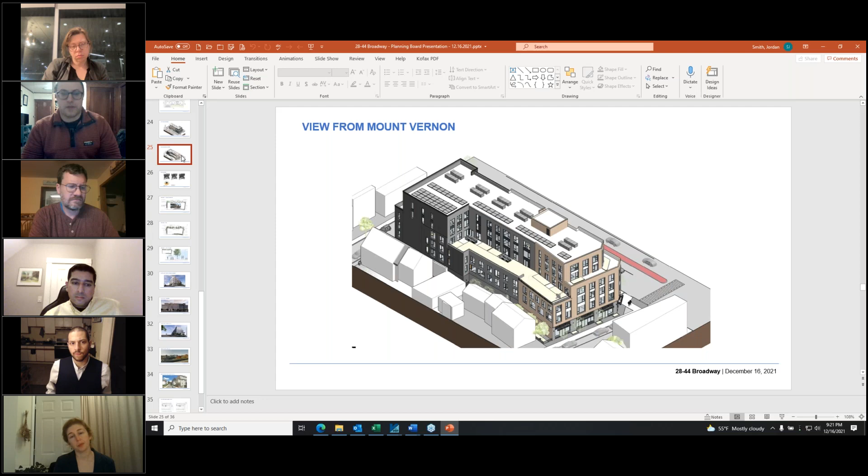We've already approved a similar project under the old zoning. This doesn't seem to reflect what I, as one member, was hoping to see out of the first MR6 building on Lower Broadway. I think the front of it looks overwhelming on the street side, and the rear of the building is a little bit overwhelming to the neighbors behind it.

I have two questions about the parking. Rob has a great point - we see a lot of people within the half-mile walk shed for transit hubs who say we don't want any parking. We understand that when you're that close to a T-stop, on a bus line, you want to minimize the amount of parking on site. I'm curious why the application includes a good deal of parking, and I'm a guy who drives most of the time, except when I go into Boston, I jump on the T.

My other question is what was the thought process behind having the entrance and exit on George Street as opposed to Broadway? George Street is a much smaller street, given the amount of units in this building and the potential traffic. I know mobility was okay with it, but I'm curious why the thought process wasn't to put the entrance on a more major street that already has traffic instead of rerouting it onto a residential street. Those are my comments and questions for the applicant - I'm wondering if they can be addressed tonight or in a future meeting.

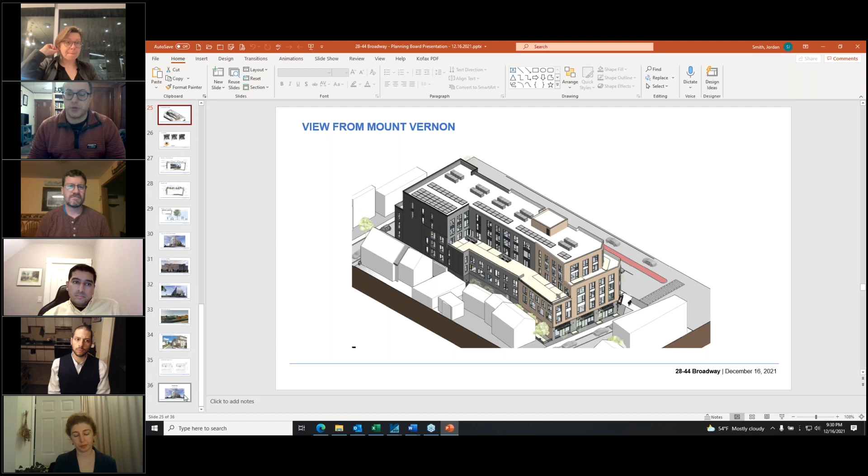Thank you very much. I do know that you've been working with the city for a long time on this application, and so I appreciate your patience. But as you know, we're just trying to make the best project that we can for such a prominent site, and it is the first kind of MR6 building on Lower Broadway.

We just want to make sure it's done as best as we can get it. So honestly, we liked the corner of the building on the previously approved design better than this south-facing corner, but that previous design would not be allowed under the current zoning because it has a cantilever, which cantilevers are not allowed under the zoning. So this south-facing corner is very important for the city as a gateway to East Somerville.

We really want it to be a landmark property. Sure, so Erin, do you have your hand raised, or are you just sitting that way? Oh sorry, I'm just sitting weird. Sorry. Okay, I didn't know if you were ready. I saw Rob had his hand raised.

Yeah, just a follow-up comment on this conversation. I want to point out that evidently a project has been approved twice for this site. We are not the ones bringing back an application - you are. We are not the ones prolonging this process - you are. So I just want to be clear, and I appreciate the length that you all have gone through to work on this site. But this is the first time we are seeing this, and I want to convey that perspective.

I guess the other comment I would say is, with respect to the design guidelines, I have in the past opened them up and read them to applicants before, and I'm happy to do that again. But I really would encourage you to go through the design guidelines - base, middle, top, talking about harmony and window patterning and canopies and everything.